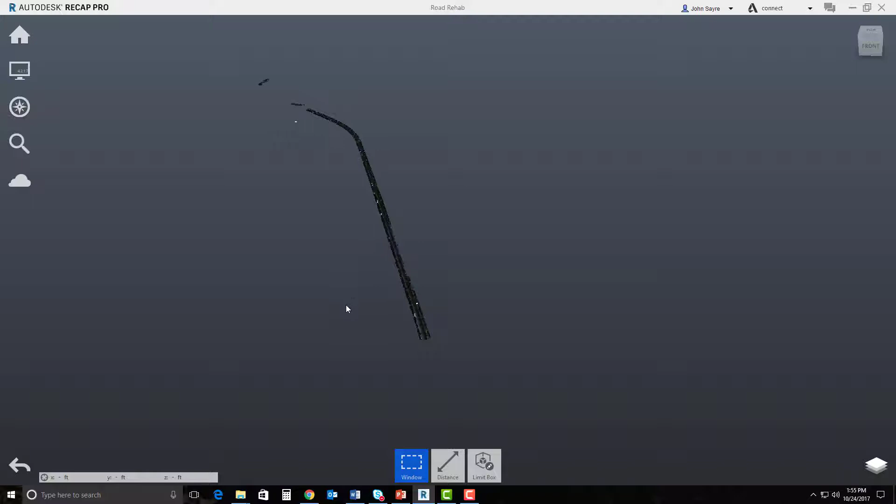We're going to go ahead and go out to a project that I've already got created, so I'll just hit suspend. At that point, by the way, you would just hit index scans and your cloud would come in and it would look just like this. If I select this road rehab project, it would look just like what you're seeing right here. So a few things I want to point out inside of this model as it populates.

We can zoom in here and start to see the level of detail that we have in this particular cloud. It's a very nice cloud. It works very well with the road rehab tools and with the linear feature extraction.

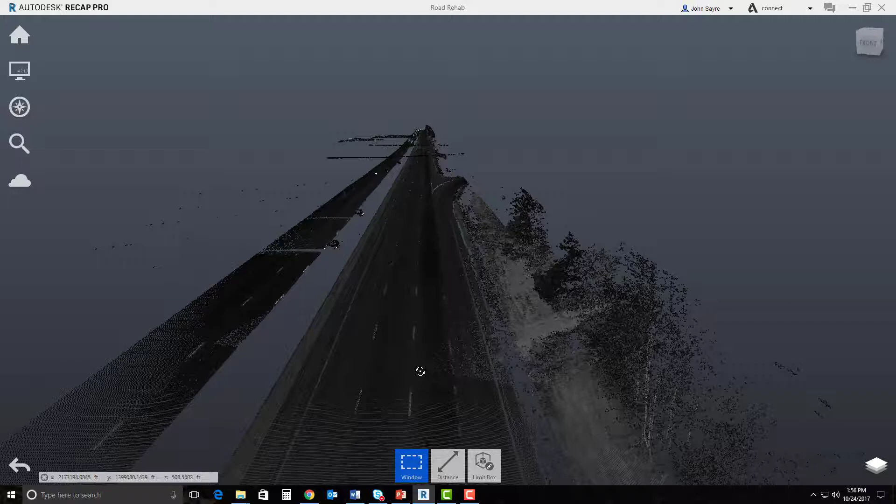So just a little bit about what we're going to pull today from this cloud. We're going to pull this edge of pavement, this stripe here, the paint stripes, and the edge of pavement on the right. I'm also going to talk about how this barrier affects us and how we can utilize a linear feature at the top of the wall and at the bottom.

I'm going to show you real quick, I can't really see this all that well, and I want to validate the data a little bit more. So I can go up here and change my color mode, and I highly recommend you go through all of these and just take a look at them.

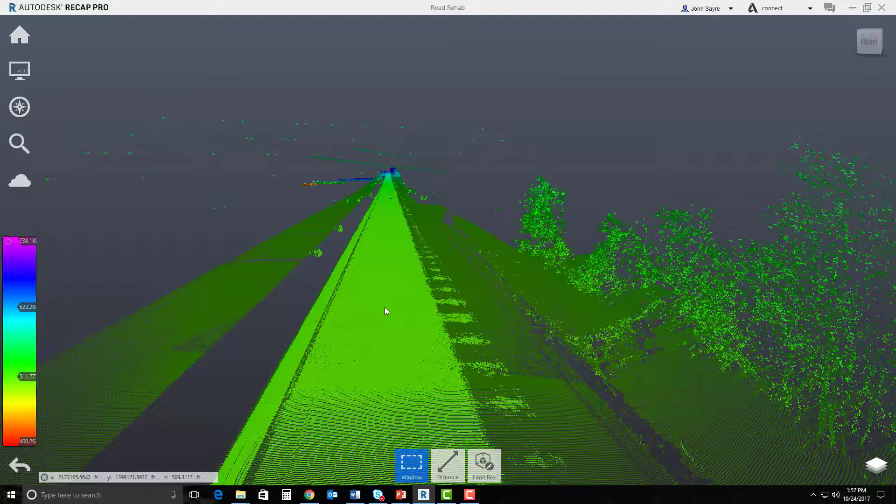We can pick elevation, and you can see that everything is visually there, but you can't really see the stripes anymore. So I'm going to switch to the intensity color mode, and now I can see all of my stripes and features that I want. This is very, very nice.

This is the way I'm going to visualize it inside of InfraWorks. We'll do the same classification in InfraWorks, and we'll be able to see this exact point cloud the way it sits right here.

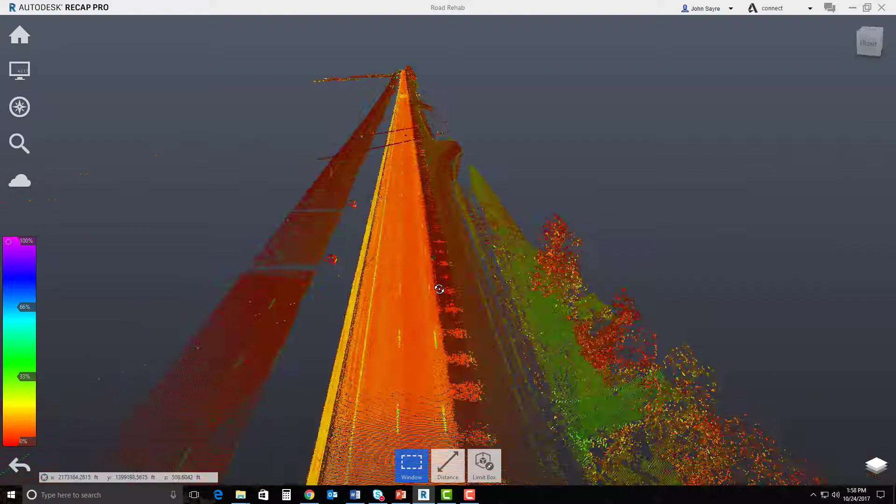So really what you're using Recap Pro for is just to aggregate all of the scans together and create one large scan. So what we want to do here, after we've got everything in, is visually confirm that it's exactly what we want.

We could go in and actually chop off this area here, because I really only want to run the road rehab tools on this area, and we don't want to pull in as much information as what's shown, because these scans are large.

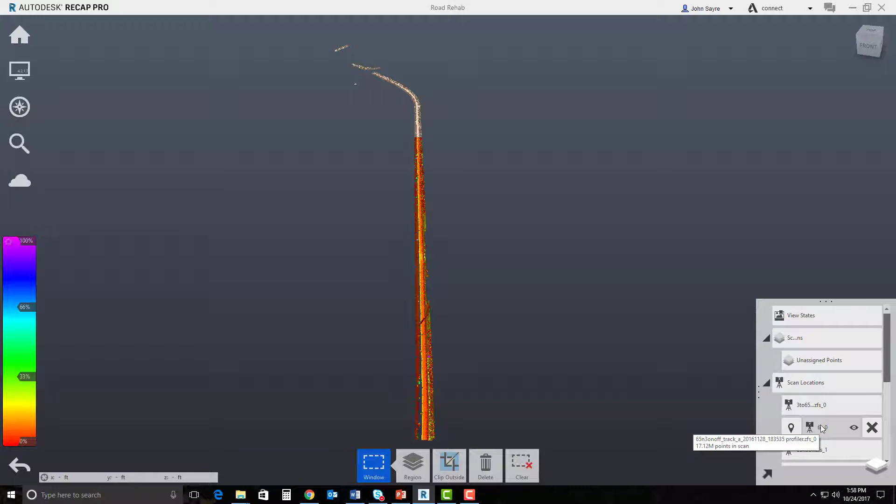They're very large. If I hover over each one, you can see that one scan is 15.84 million points. We could drop down to the next one, it's around 17 million. So you can see that the Recap engine is very strong, you're able to move around and navigate very quickly even though there's a huge amount of data inside here.

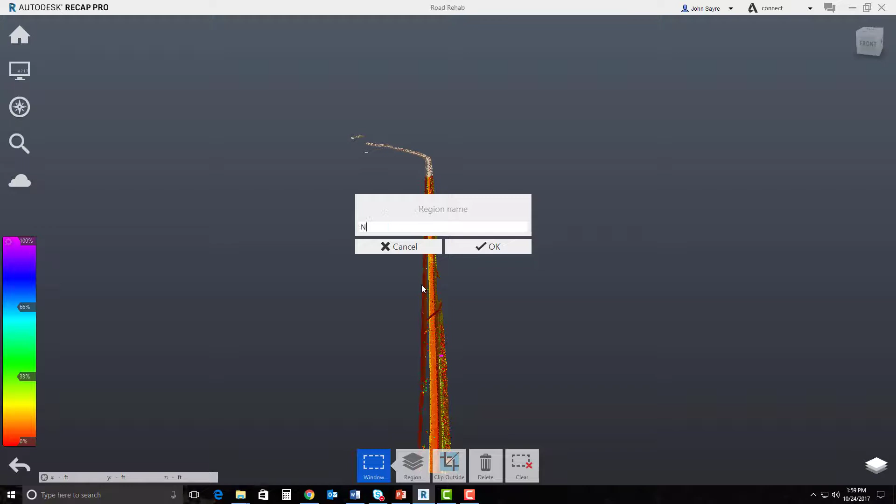So we could do this a couple ways. We could actually create a region here, hit new region, and call this 'don't need' -- you can name it whatever you want. Hit OK, and it changes colors.

Then we could go up and turn off that region, and once we see just what we want, we could hit save, and save this RCP.

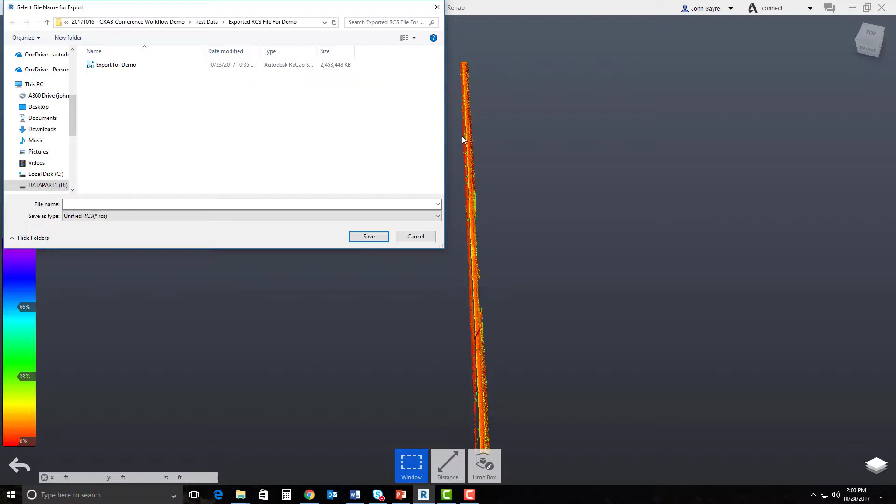Now, if we wanted to leave this RCP alone and just export out what we need, we could go back up to the Home tab and export out a brand new RCS file, which would only contain the information you're seeing here on the screen. That makes it a little lighter weight, and it comes in and navigates more easily inside of InfraWorks and Civil 3D.

So again, we know we've got everything we need here, so I went ahead and saved to the RCP -- just went up and hit save -- and we're ready to go to the next step.

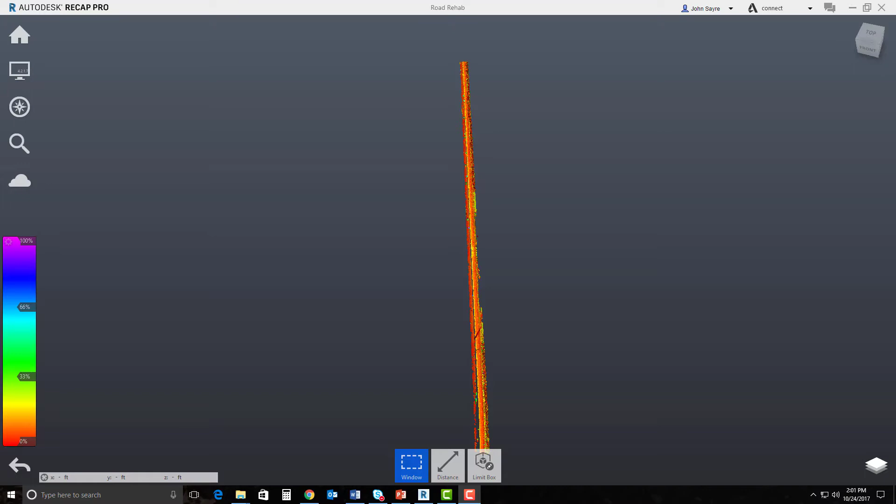So I've created a second video to be the second of three videos on that next step, and that is how to use the linear feature extraction tools inside of InfraWorks. This would be the second step of the three in this particular workflow.

I hope that the information in this video has helped you understand this step of the workflow I've been describing. Please look for the additional videos that take you to the next step. Have a great day.